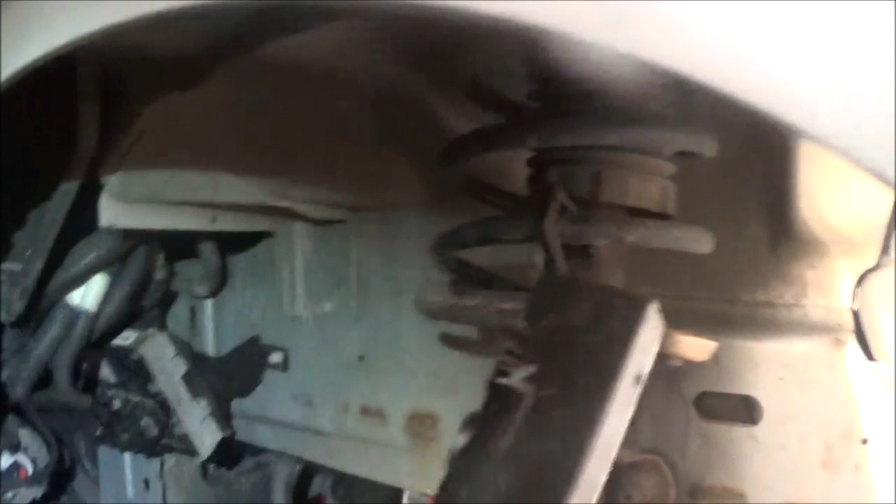You know, first, I was doing a lot of testing, and I did some things that ended up being unnecessary, and I ended up getting it to start. Now, you see here, that's the computer. I had that off, and I was testing wires in there, and what else? The TIPM. I had this off and out. So I was testing there.

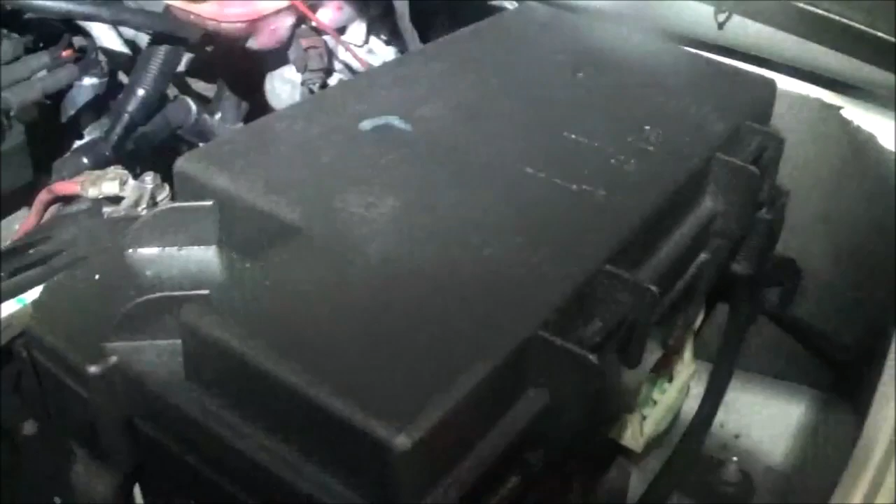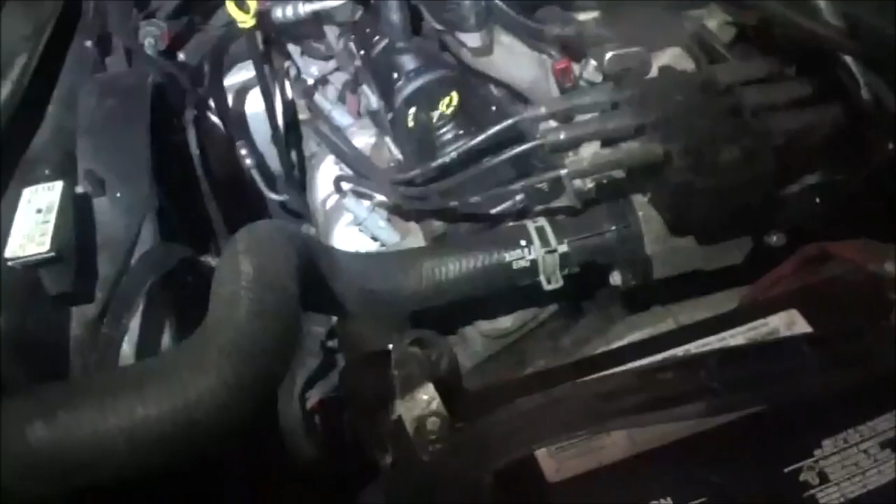There was a relay. It would click sometimes, sometimes it wouldn't click. It was the starter relay. So I was testing the relay, but the relay was okay. And there's one other thing I tried to do, and that was to jump the starter by putting voltage to the trigger wire down at the bottom. And one thing that stayed on my mind is that I could not get the starter to engage.

So I went underneath the van and checked to make sure it had its 12 volts going to the positive on the starter, which it was. And I took the trigger wire off, turned the ignition on to see if it was getting 12 volts. And it would show it, but when I would put it back on the starter, it would come on and go off. So I didn't know what was going on. Was there something in the starter or what?

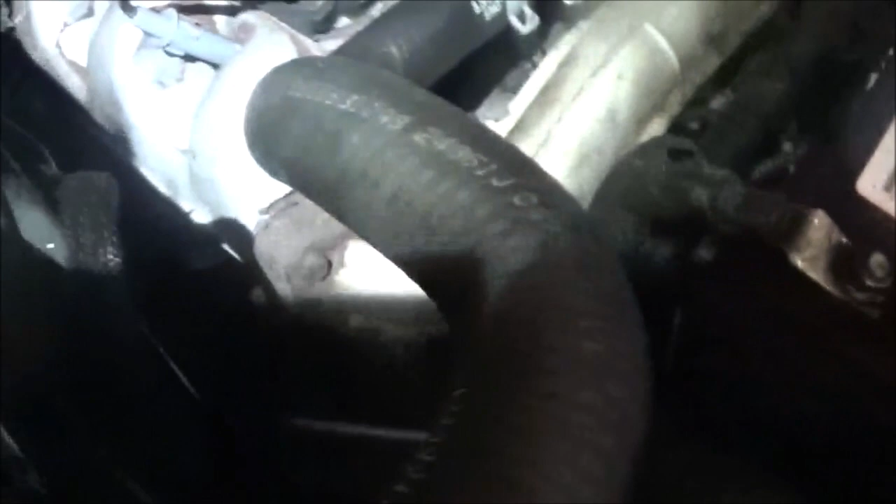I had the transmission range sensor connector off there. See if you can see it. Yeah, there it is. I had it off and I was testing wires. This is a 62TE transmission. And the reason I did that is because it had transmission range sensor rationality. Okay.

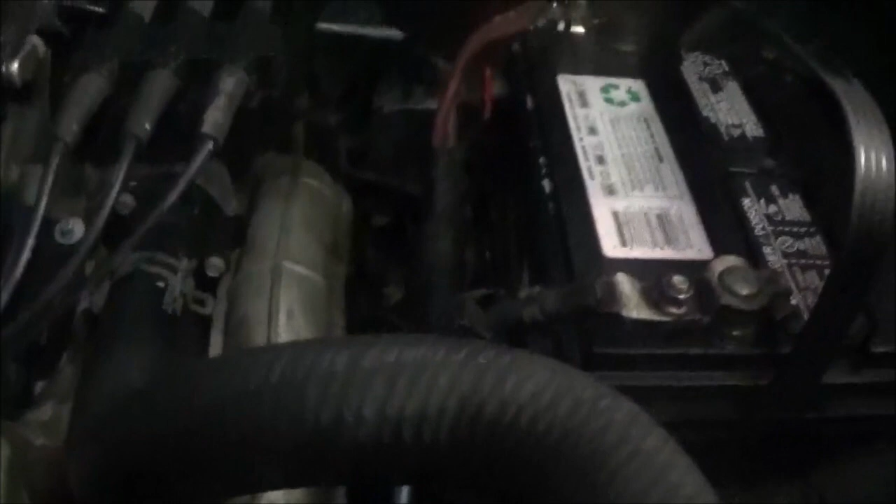As you can see, there's a new starter there. They put a brand new starter on 3 times. Didn't solve the issue. So the main wire right there had its 12 volts, but this little trigger wire here wasn't working. And there was nothing wrong with it. First I tried it there, but I tied into it here. I even tried to jump it at the relay. I figured there might have been a problem from the relay down, so I tied in here and still couldn't get the starter to go.

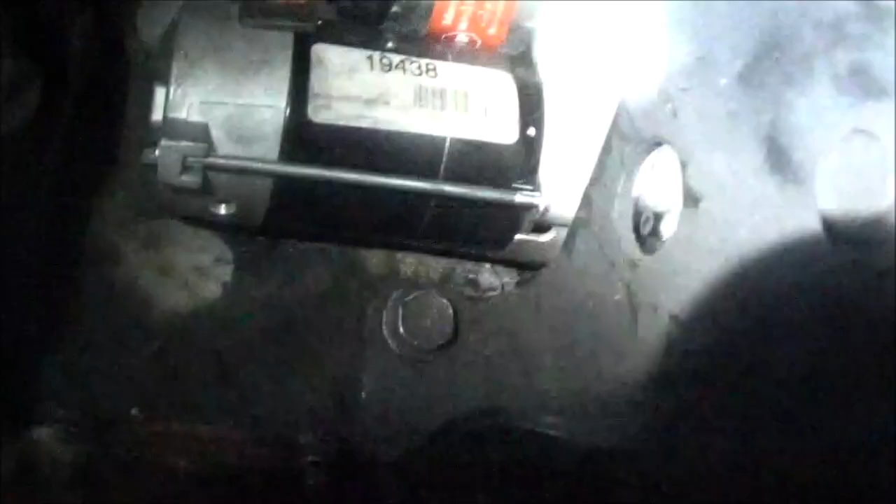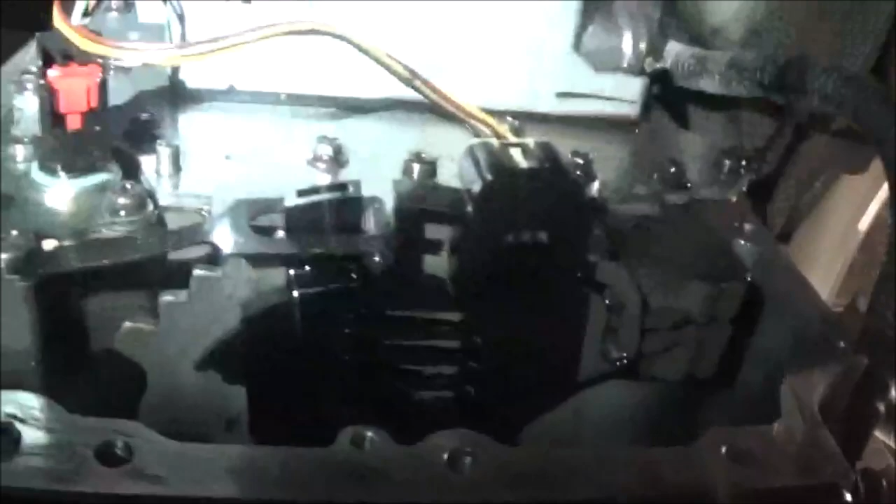I ended up taking the starter off, but I'm going to show you what made me do all this. I had a code, a P0706. Okay, so let's go to what caused me to go through all this mess in the first place. Before I go there, I forgot to show you. I do have this part of the transmission off. The 706 is a transmission range sensor rationality code, P0706. Okay, so that's the transmission range sensor right there. And I ended up changing that transmission range sensor, and it didn't solve the issue.

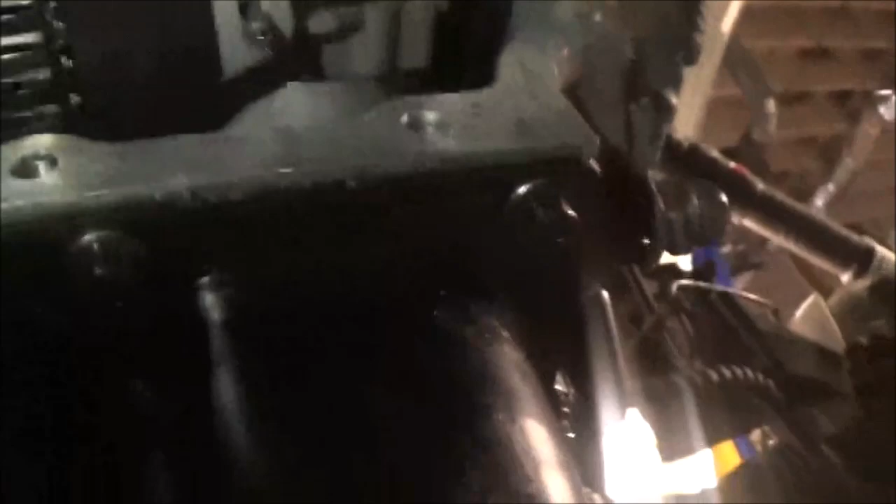Okay, so you have those issues sometimes. So I ended up having to actually find this problem. Okay, the vehicle wouldn't start, and the park, reverse, neutral, drive was all lit up like this. Now the reason it's lit up like this now is because I'm simulating the problem, because I found out what it was, and I'm going to show you what it was. But I want you to see some things that it was doing.

One, it was all lit up, and two, the starter would click, click, click, wouldn't turn over, and then after a while it would not do anything at all. You could turn the ignition all the way over, it wouldn't do anything. So the codes that it has now, since I have something disconnected, is this right here.

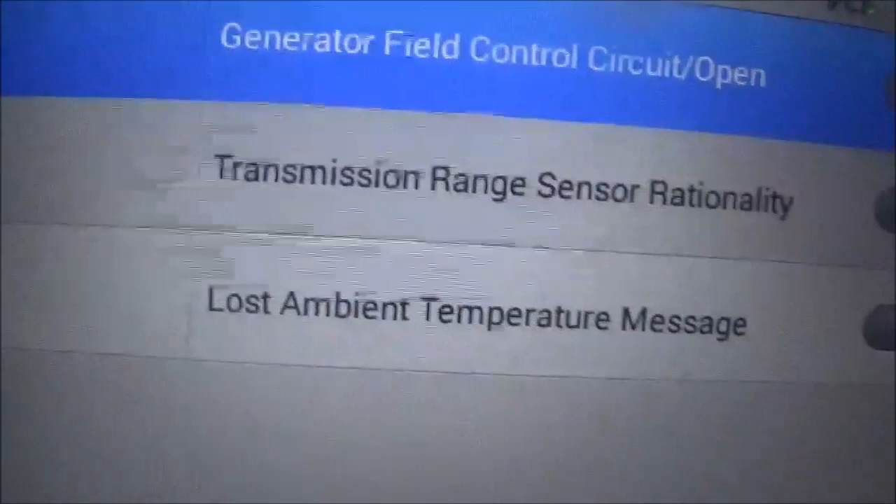It has P0622, P0706, U110E. Now the codes that it did have were the P0706 and the U110E, which was transmission range sensor rationality and lost ambient temperature message. It did not have the P0622. Okay, so I'm going to go back into the history and let you see what it had.

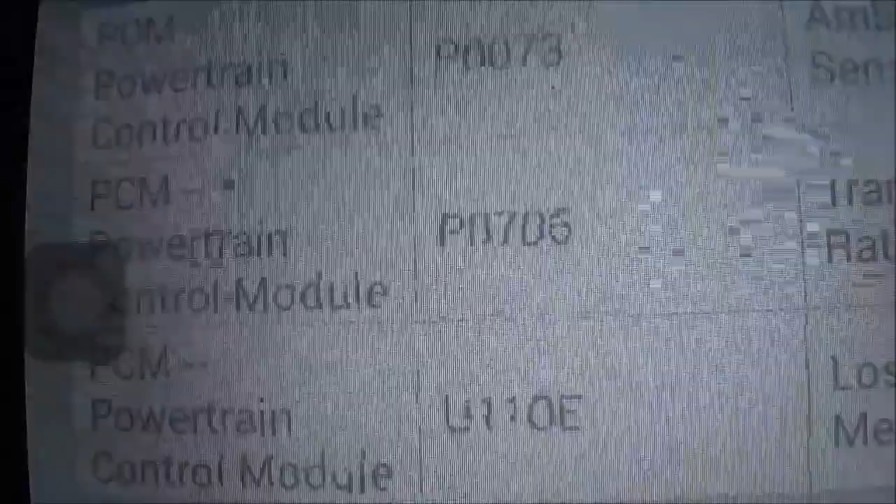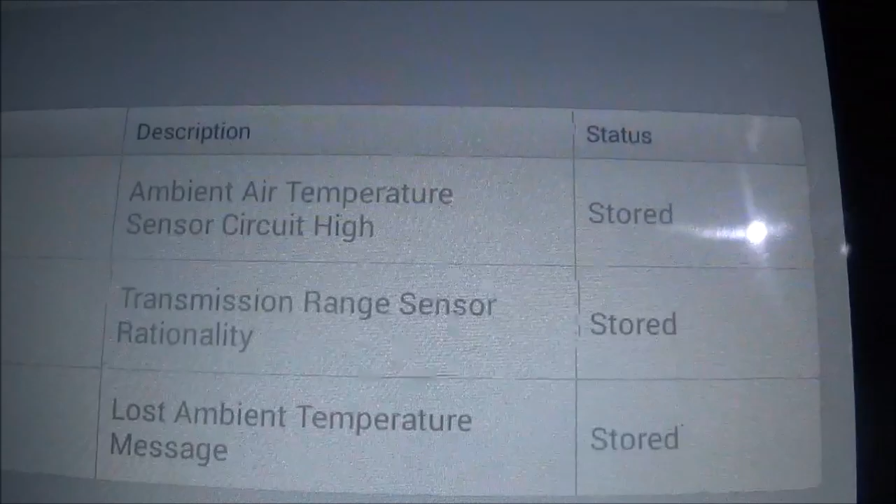Okay, here is the history here, historical test. In the history, it had ambient air temperature sensor circuit high stored, and there it was, the P0706 transmission range sensor rationality stored, and it had that U110E, PCM powertrain module lost ambient temperature message. Okay, this is what was stored originally while it would not start. And also the park, reverse, neutral, drive was all completely lit.

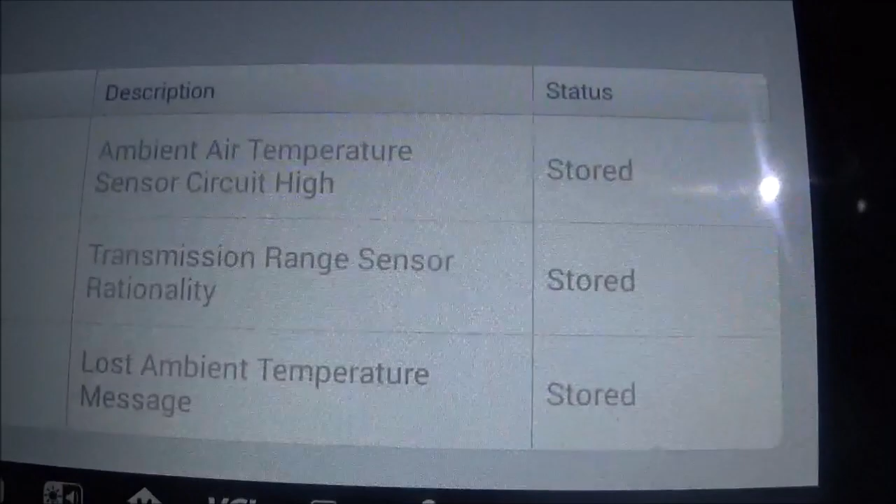Okay, now there's something else that was happening when I went to the live data. It was showing in the live data, when I looked at the transmission range sensor, that the pattern of open, open, closed, open, all of that was working the way it's supposed to.

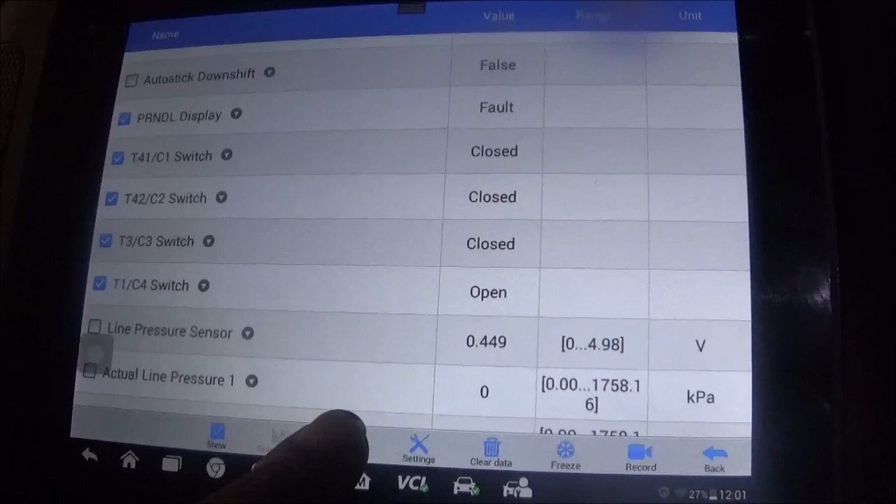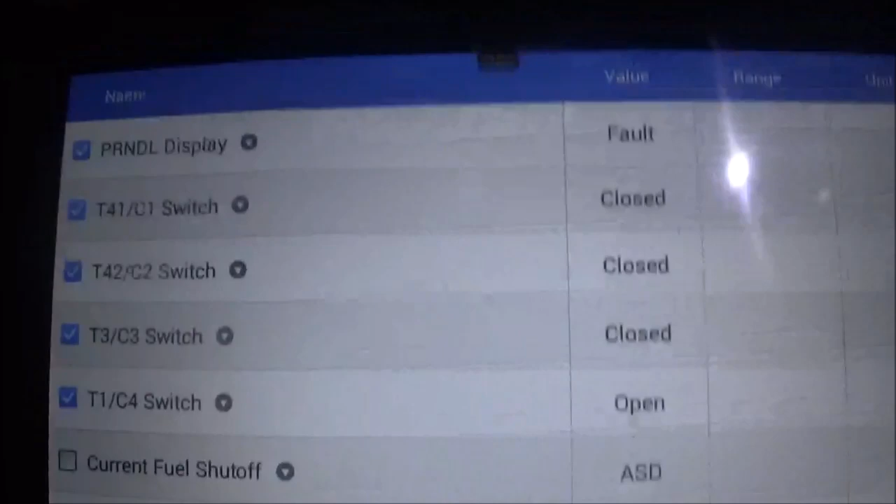Alright, let me go to top. Now if you see here, it said the PRNDL display has a fault. But what was happening, the T4 switch, 41, 42, T3, and T1, the ones at the bottom there, they all were reading like they were supposed to, but it would still say fault. So right now the display is completely lit up right there, but it still was a fault even though these would read correctly.

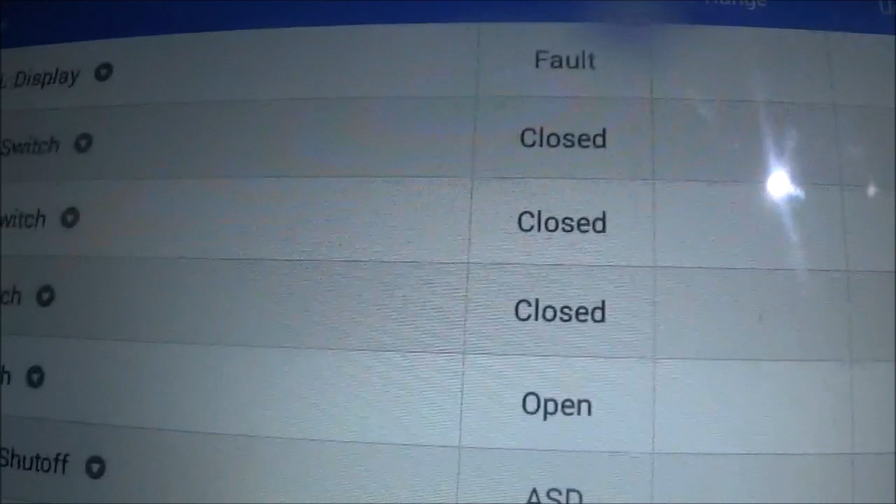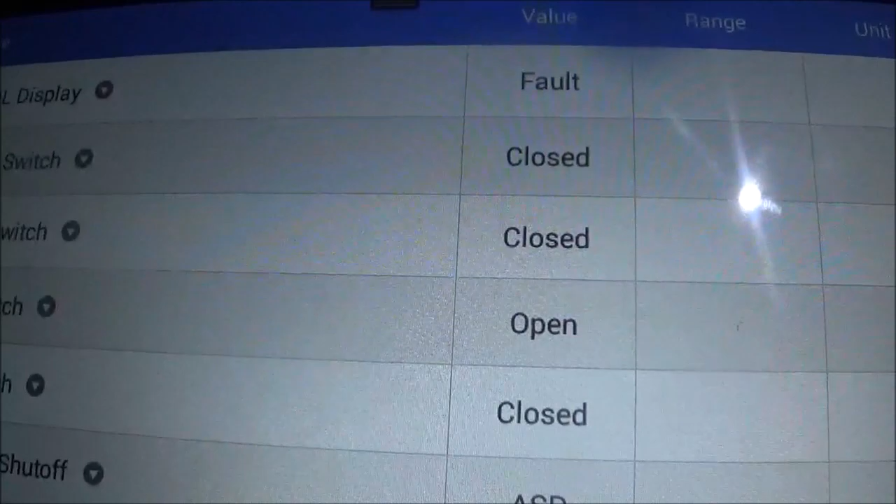So I'm going to put this in gear now. Let's see if it does. See, they will read. Now that's the problem. That's the correct pattern. Open, open, open, closed. That's in drive, I believe. So you got park, which is closed, closed, closed, open. Reverse, open, closed, open, open. Neutral, closed, closed, open, closed. And drive, open, open, open, closed.

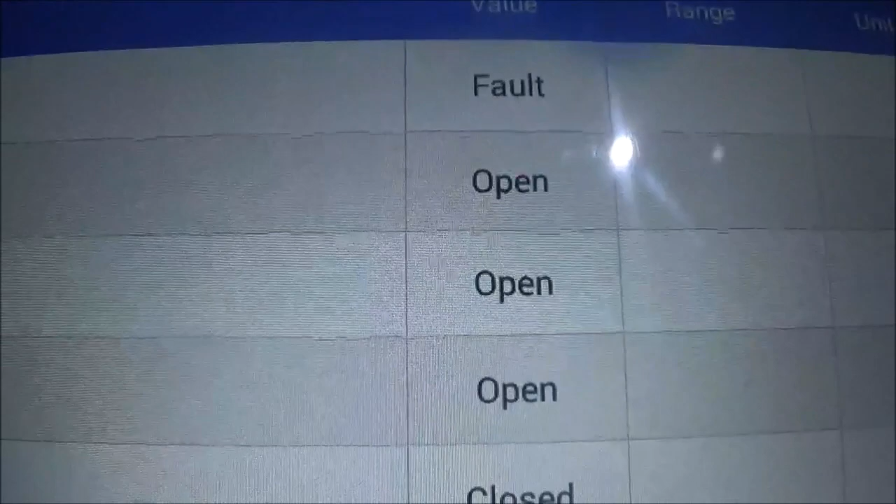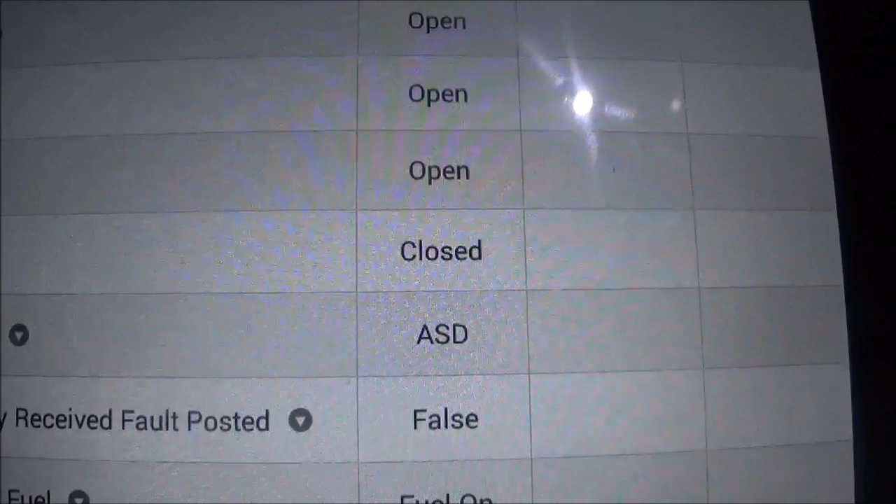So even though it was showing the correct pattern, why was it still saying there was a PRNDL display fault, which it was? Okay, and which it is. So now, and why was it that the car would not start? Well, after doing all of the testing and the things that I was trying to do, as I told you, I took the computer off, I tipped them off, I jump tested, tried to jump the starter. That stayed on my mind.

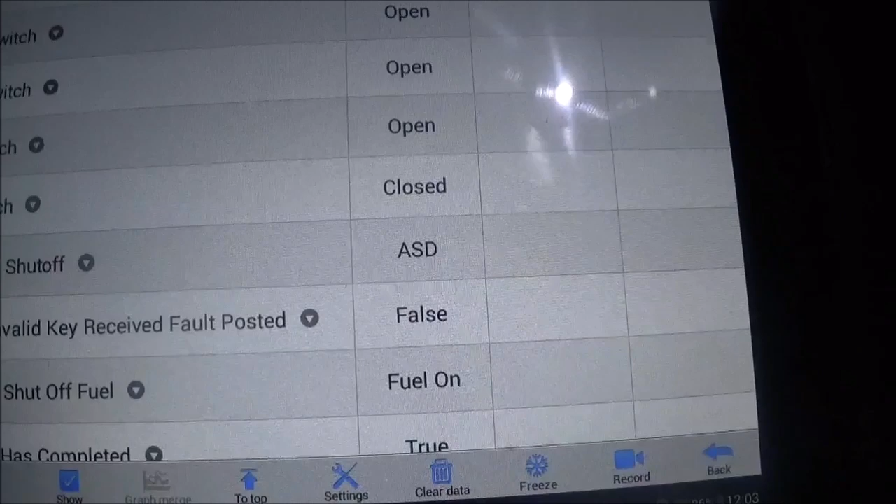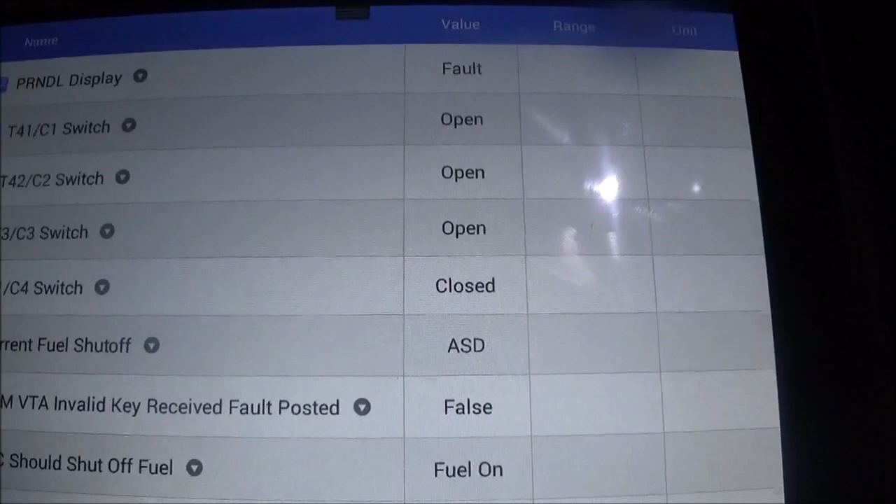So what I ended up doing is taking the starter out, tested it, made sure it was fine, and it was. So there's a shim in between the starter and the transmission housing. I took the shim to the grinder where the wire wheel was and wire wheeled it off, and I put it back on. However, while I was putting it on to make sure that it had good connection, I looked to the side where the transmission was, and that's when I decided to do something. And it was tight, but I decided to do something. I'm going to show you what that is.

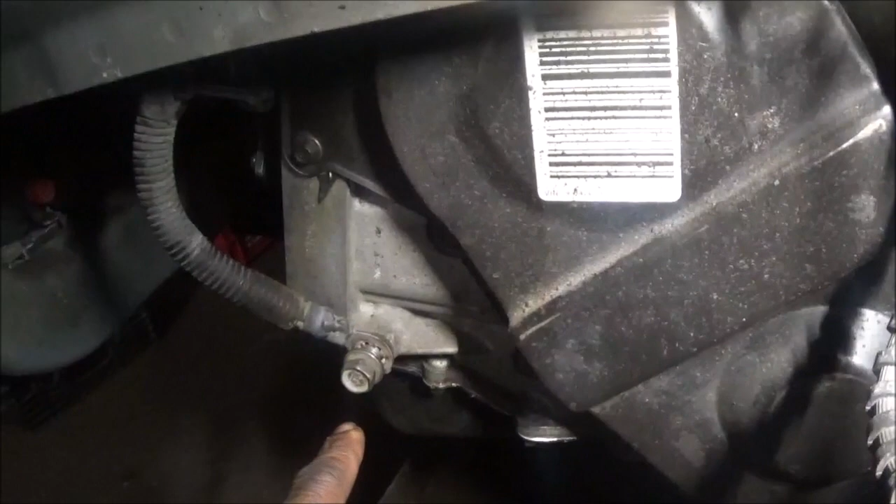Okay, over here on the driver's side, there's where the computer is, and there's where part of the transmission is, a ground right here. Now I have this loose. I have it loose to simulate the problem. This is why the car won't start. It's also why there is a transmission rationality code, which is a P0706. Now it was tight, but what I ended up doing was taking it off.

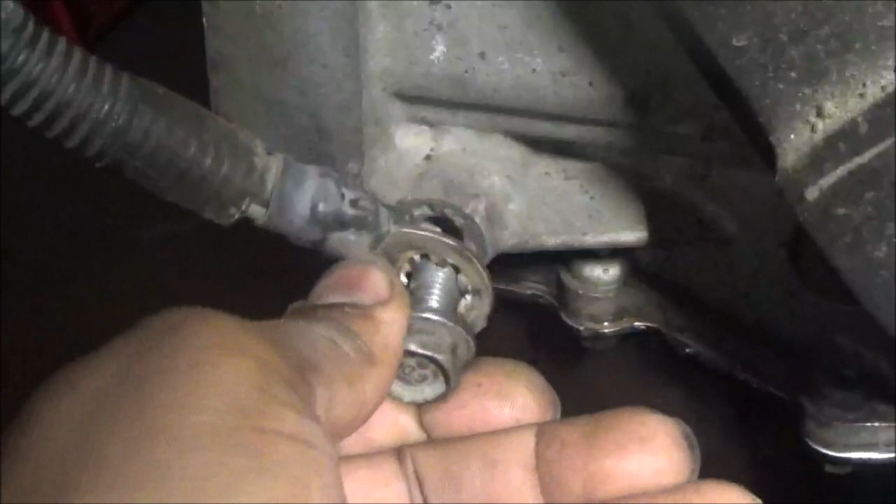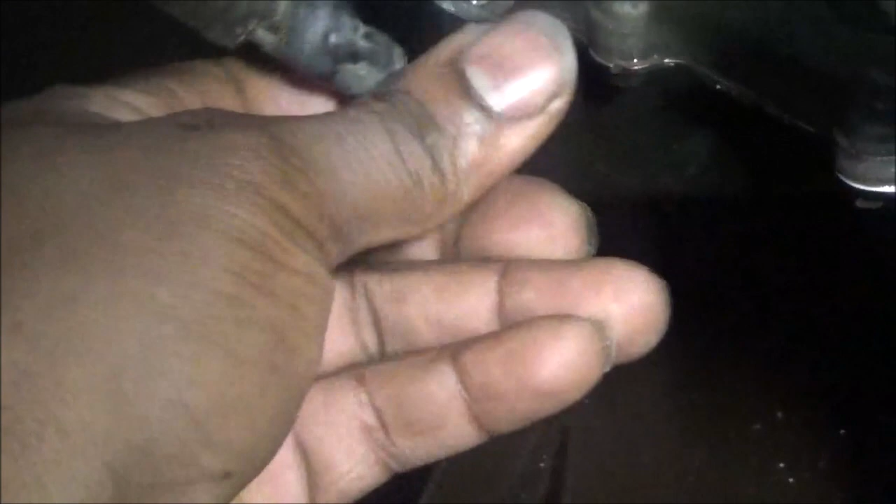I took this off here, and then I took my wire wheel and I cleaned this with the wire wheel. Then I wire wheeled this part and the opposite side, and then I took this bolt here to the grinder and wire wheeled it, this also, and then I stuck this back on. Okay, now right now the car won't start, or if it's very close, it may start. Now, I don't even have this all the way. It may start because it has some type of connection here, or it may not. But you see here, this is not tight here.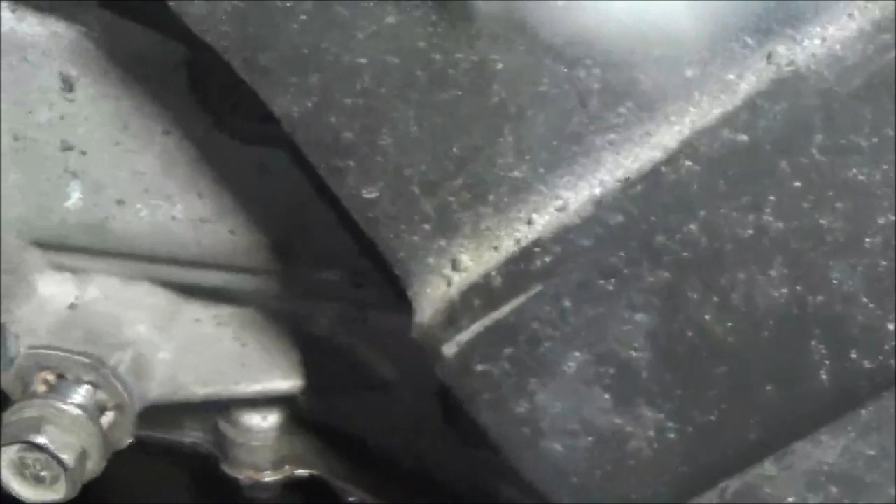Let's see. I'm gonna go over here, see if it starts. Still has the codes there. Even if I erase them, they'll still be. Let's see what happens. Now I'm turning the key, it won't start. As you can see there. Let me see here. Where's the key? Turn the key, won't start. Okay, and it has the P0706 code. Okay, let me go back over here.

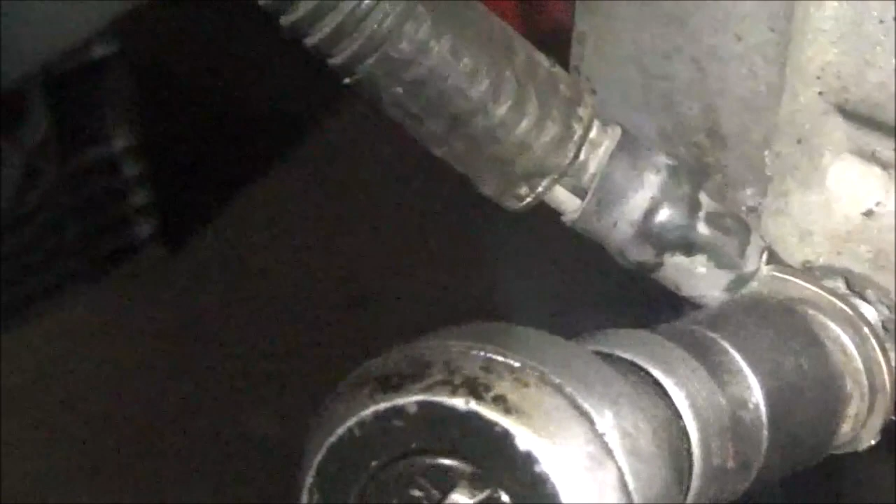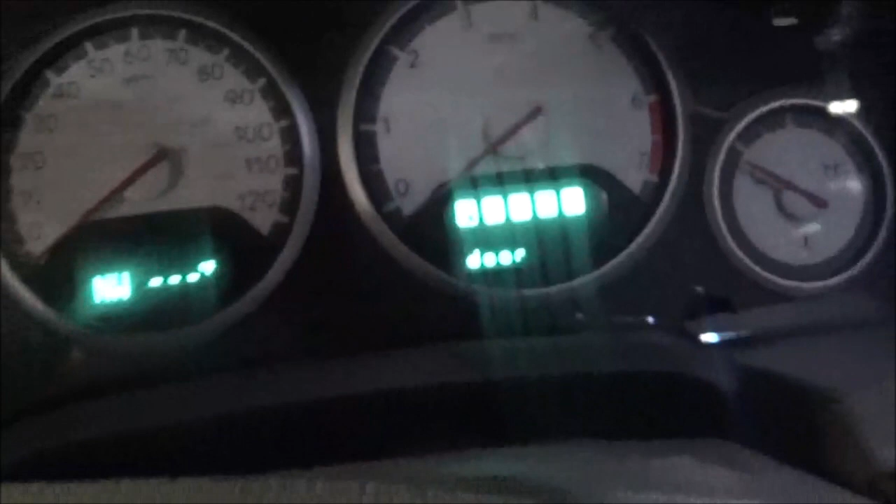Where is it? Okay, it's a grainy thing. Okay, what I'm gonna do, I'm gonna tighten this bolt up. Just tighten it up. Okay, now we're going to see what happens now. Still doesn't want to start.

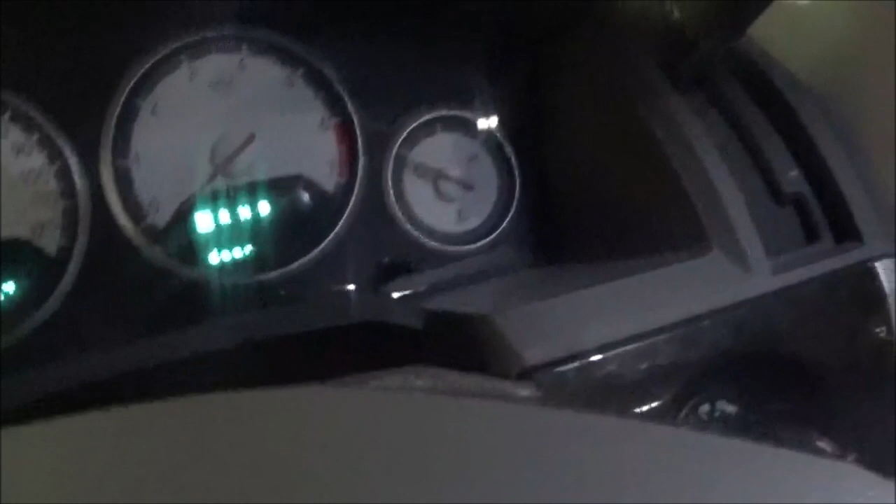Let me go right back down there. Okay, I know why it didn't start. When I erased the code so it can go back to park, reverse, neutral, drive, I couldn't see that I had the gear selector down in drive. So that's why it didn't start. So what I'm gonna do, I'm gonna loosen that bolt again, and we're gonna see this go back to the rationality. No rationality right now, all the codes are eliminated.

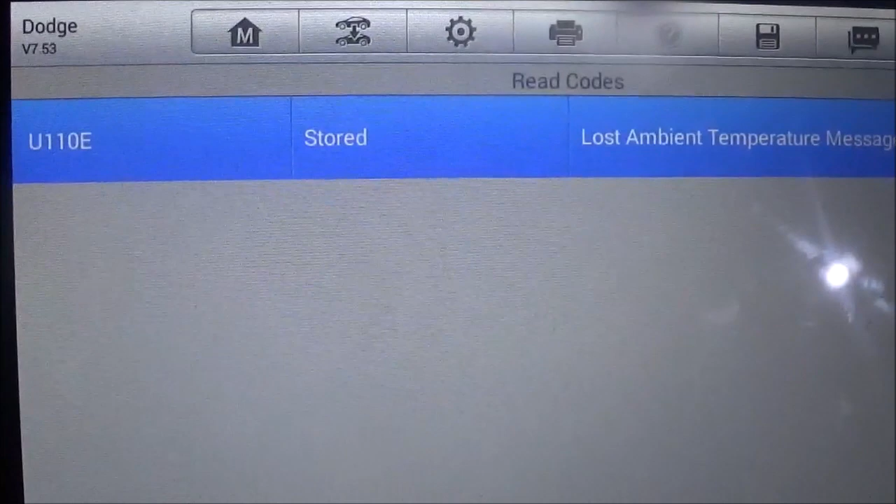So let's go here. So what we have, that P0706 is not there anymore. Okay, it's there no more. So what I'm gonna do, I am going to loosen that bolt up again, and then we're going to see the P0706 pop back up. So let's go back. Where are you there? There you go.

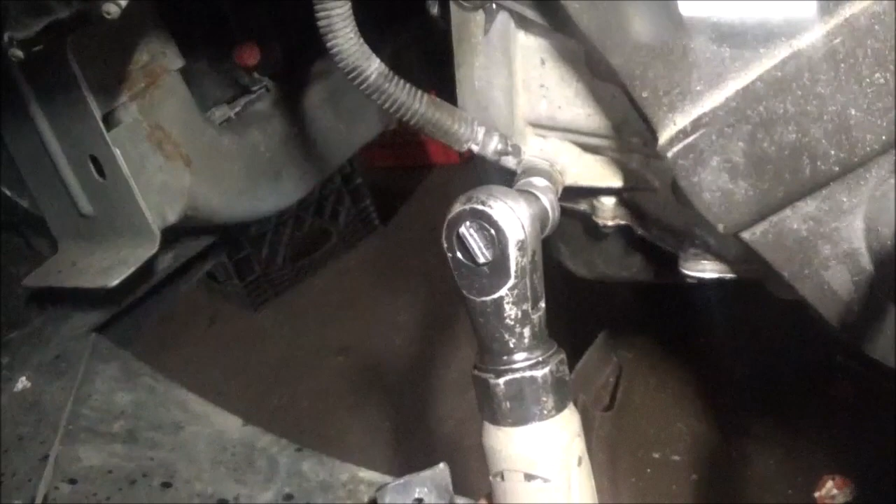Okay, that's loose. Make sure that I don't have much of a connection there. Now, that rationality should come back. Let's see. It may start, it may not start, but let's see what happens with this. Okay, I'm about to try to start it. It won't start. Well, it's trying.

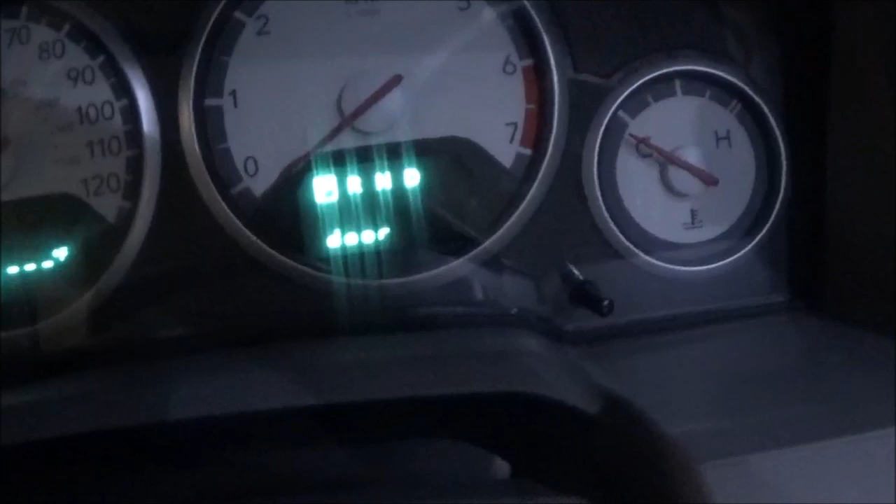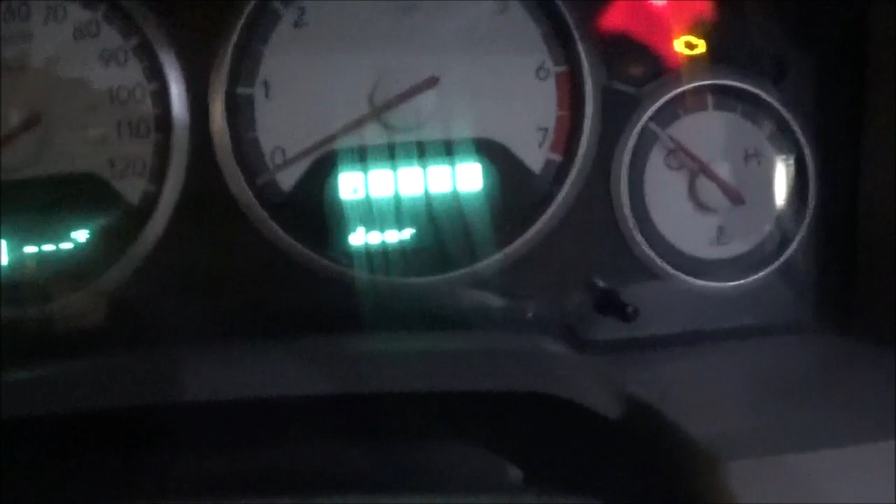Okay, it's still making some kind of connection. So what I'm gonna do, let me go and make less connection. Where are you, bolt? Alright, now that's even less connection. Okay, let's see what happens. Still making connection. There it goes. See what happened? You hear the starter go clink. Alright, there it goes. It all lit up.

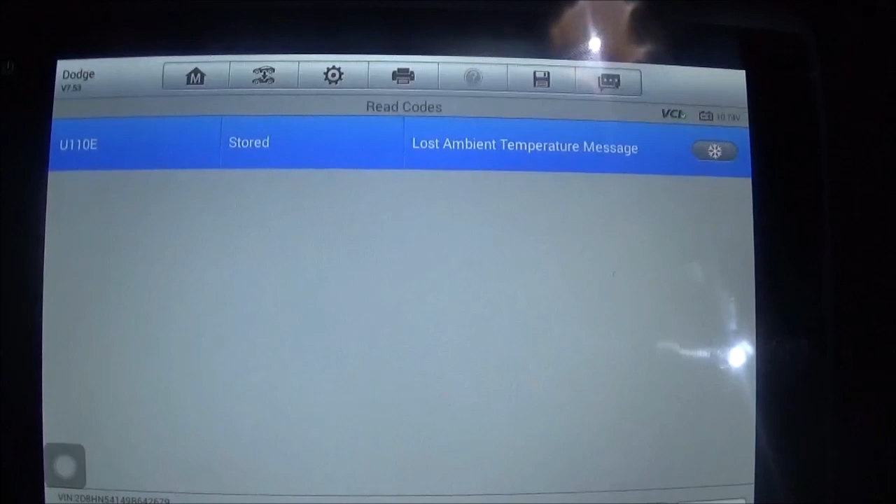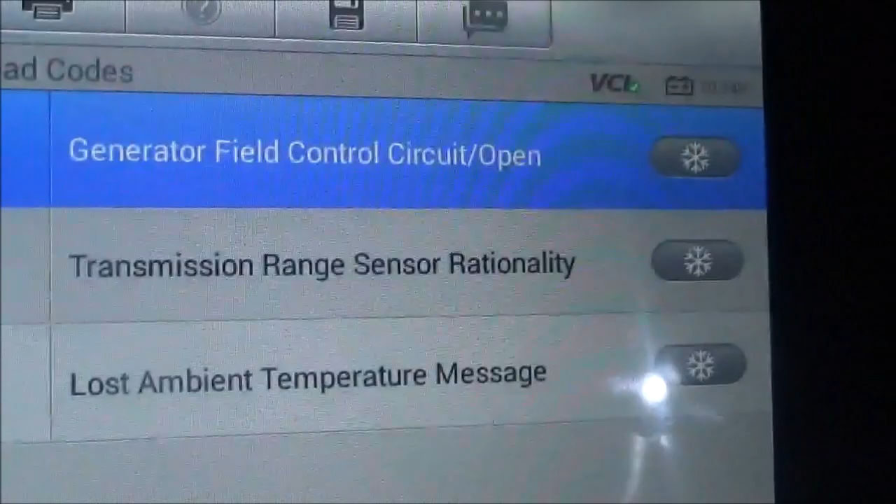Okay. So it should have that P0706 code. Let's go back to here. We'll back up and reread the codes. There it is. P0706, transmission range sensor rationality, and the U110E, lost ambient temperature message or something. There, those set again.

Alright, so again, what happened was that, okay, let me get back over here. That ground was not loose, okay? It wasn't loose. So I just happened to go to that ground because if that starter wasn't getting a connection when I tried to jump it, the only thing I could see that could provide a decent ground for that starter would be that ground that's coming here. It's a very big ground. So as you saw, there was a fault. It was showing close, close, open, open, open, close, close, but it still said a Prindle fault.

Now what I'm gonna do, I'm going to put some dielectric grease on this, and I'm going to tighten that ground up, and we're going to go right back and see if the Prindle fault is gone, even though it's still showing open, open, close, open. I already cleaned it off, and I just want to make sure it's not corroded anymore. And then we'll check to see what the computer says with the signals. Okay, I got it tight. Make sure you get this very tight. It's tight, and I got dielectric grease on there.

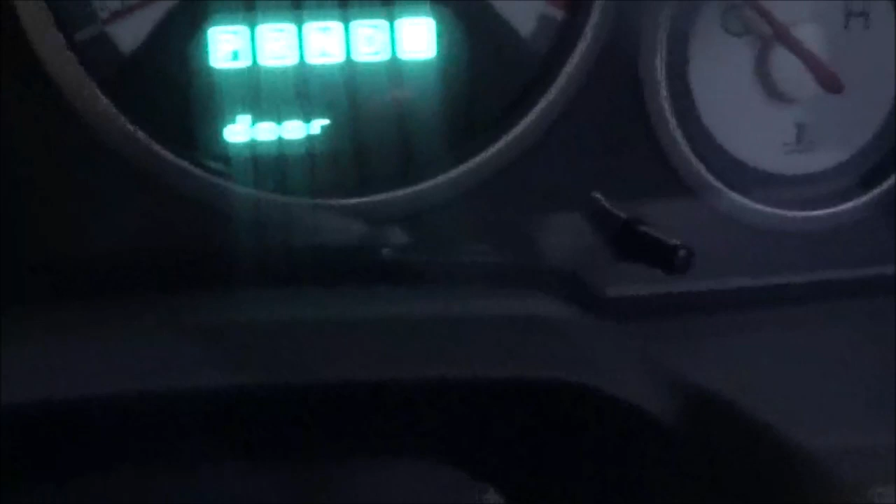Now we're about to go inside the van, and I'm gonna have to erase the code, or the PRNDL light will stay that way. We erase it, and then we're going to look at the data PIDs and see if that false rationality reading is still there. That's going to still be lit up until I erase it. Okay, now I can look at it as in park. So this should start. All I do is bump it. Yep, it starts.

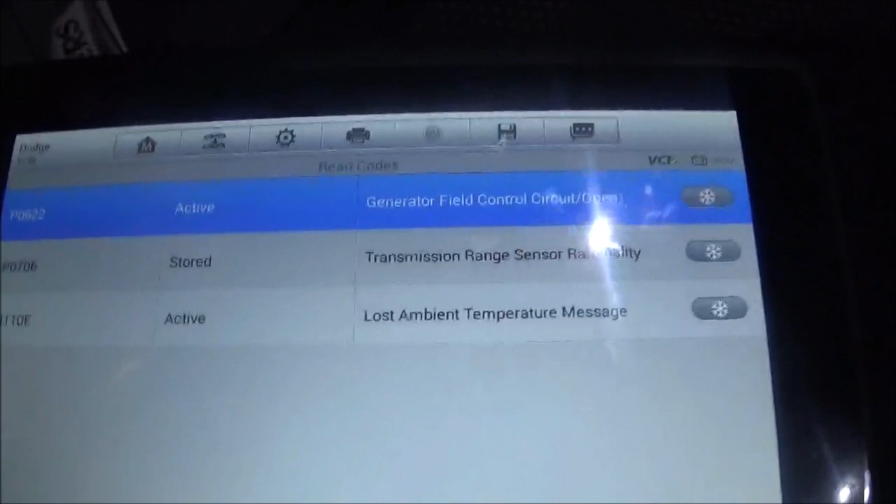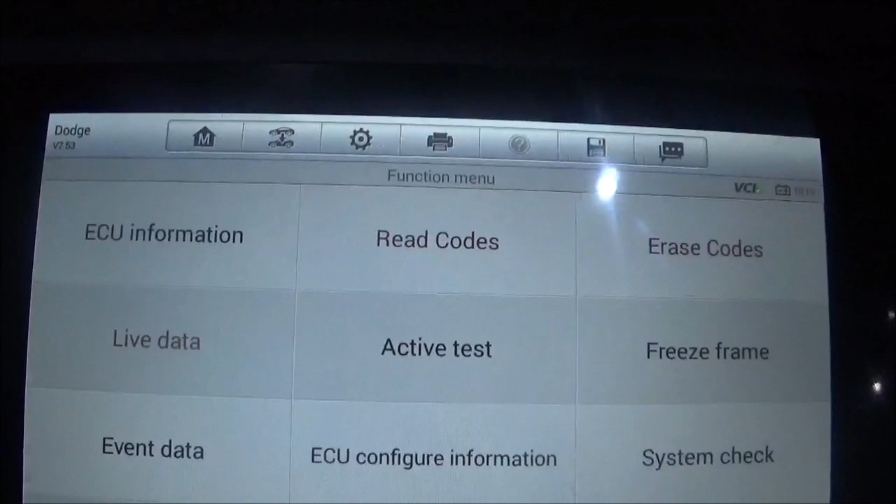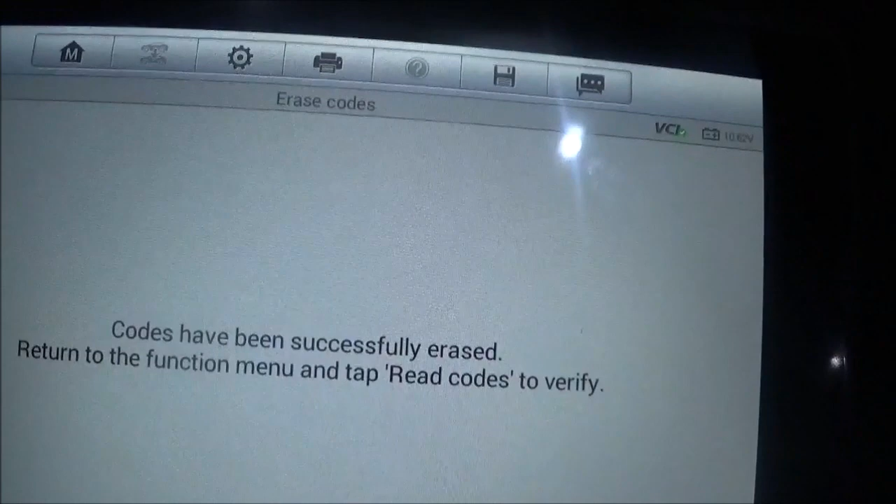Okay, now I'm gonna go back here. And the codes there, I'm going to erase those. Ignition on. Yes. Yes. Codes have been successfully erased. So, since it's erased, you look up here and you see that it's showing park, reverse, neutral. Now, that should bump no problem. Let's try again. It did. There you go. I can't start it completely up because I had that front trans pan off.

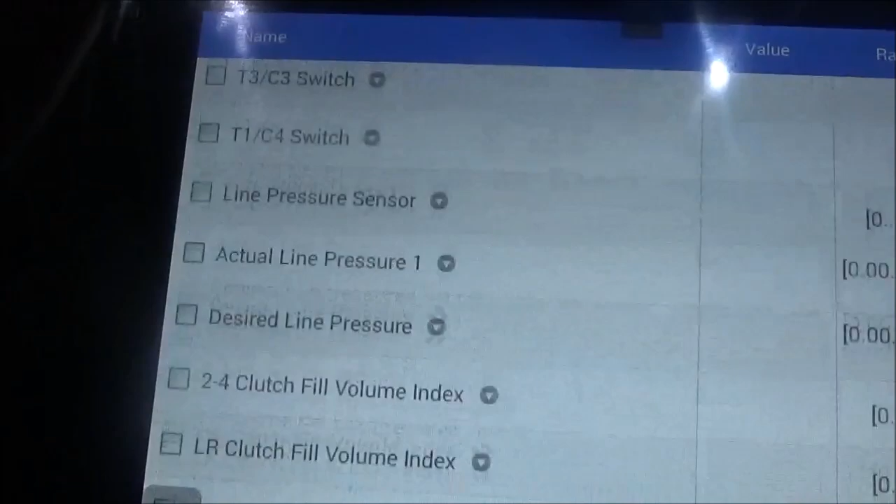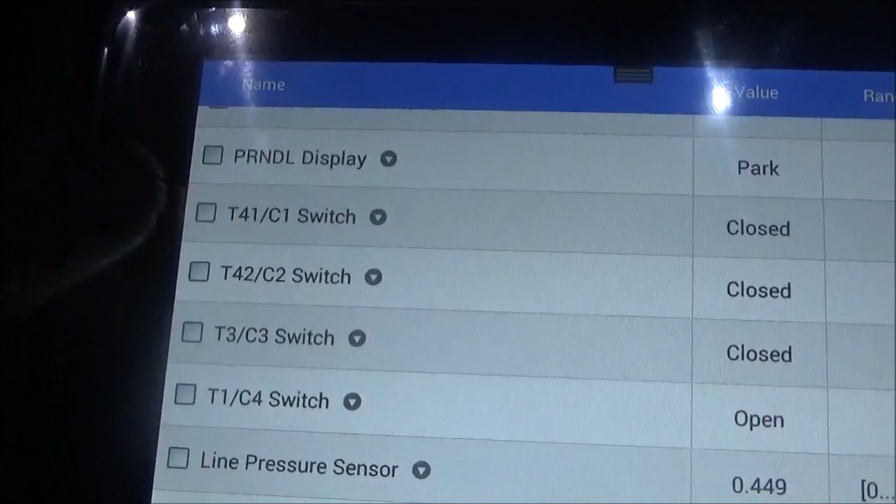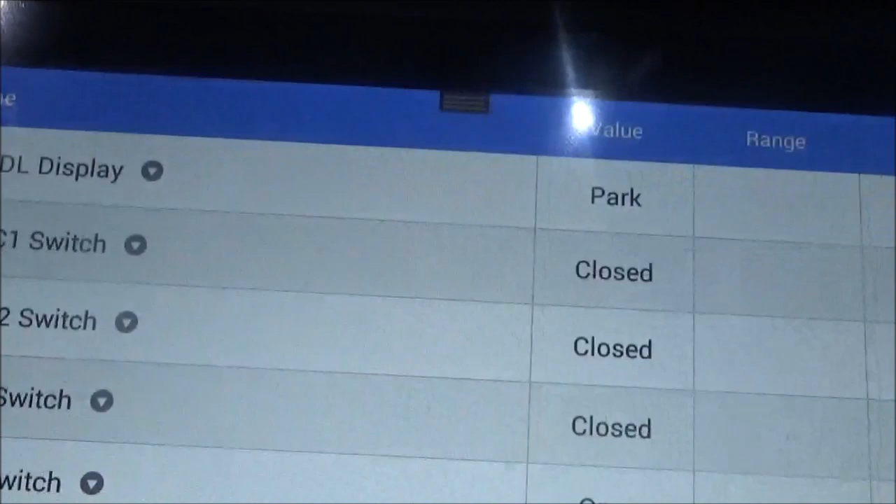Alright, now, I'm going to go over here. Go to live data. And what I want to do is go up to the transmission range sensor PIDs. I passed them. There it goes. So the PRNDL display. You remember this was reading close, close, close, open. This will always change, but this had false on here. So now it's not showing false. So let's see what happens when I put this into gear.

Let me get inside this van. Ugh. Man, I'm all smashed up in here. Oof. Alright, there we go.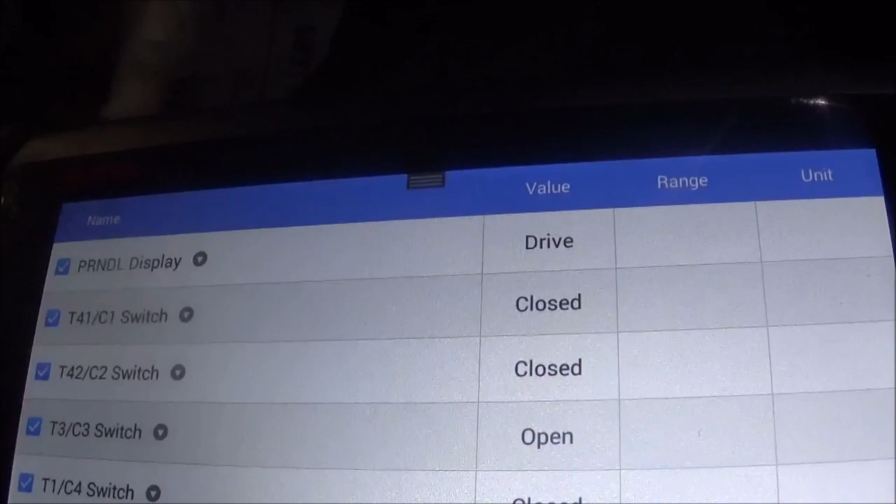Now, turn ignition on, and I'm going to move this. Park. See, reverse. Neutral. Drive. And we're looking at that part there. Neutral. Reverse. Park. Now, everything else, the pattern was right. Close, close, close, open. It's just that this part here was reading false, the PRNDL display. So now we got that right. The PRNDL is doing what it's supposed to do: park, reverse, neutral, reverse, neutral, drive. That's working like it's supposed to. If I bump it, it'll move. Bump, bump. The starter is doing its job.

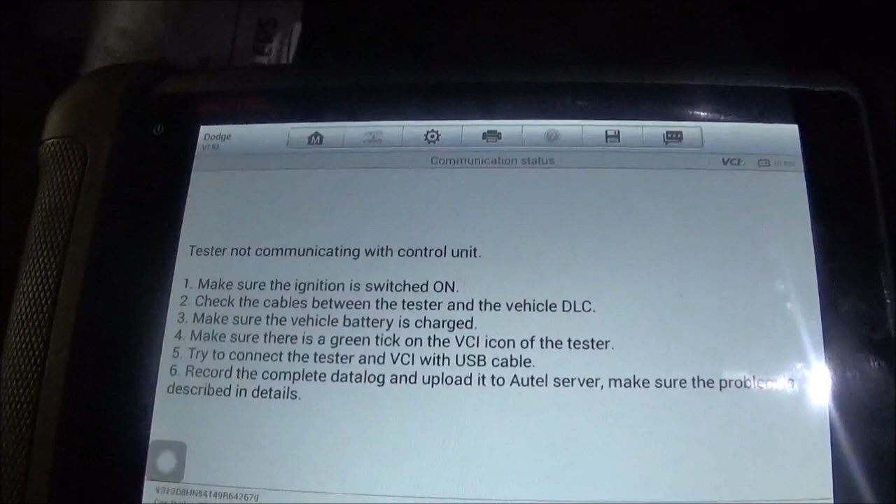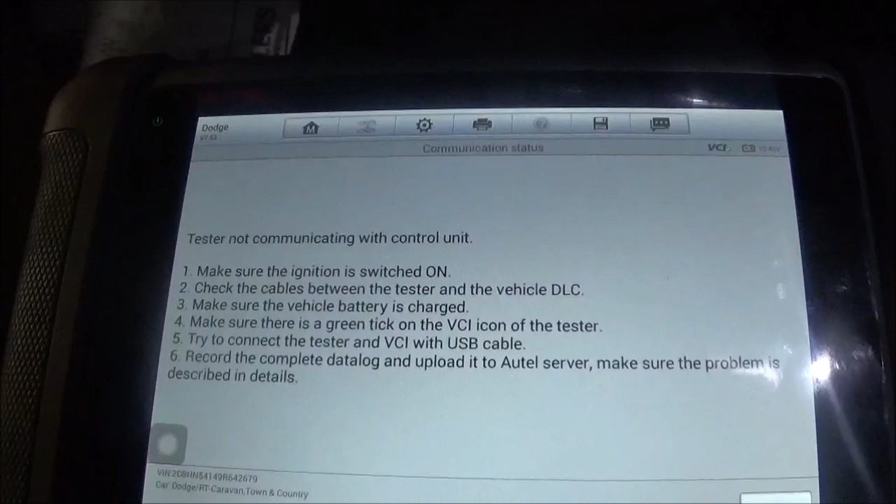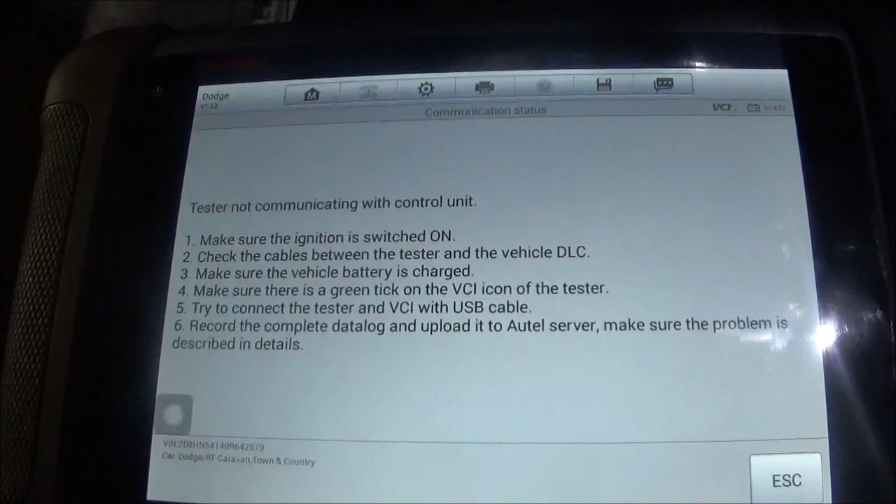Okay, so what would I tell you on this? Check the grounds. The code P0706 was set. The symptoms were a no start or clicking sound. It would click, click, click. It would not start at all. The PRNDL was lit up with squares on all of the display, and it had a code P0706. So what does that tell you? Always check the ground. Again, the ground was tight. However, it had corrosion that was separating it from making a good ground. And the only thing I did with that ground was clean it.

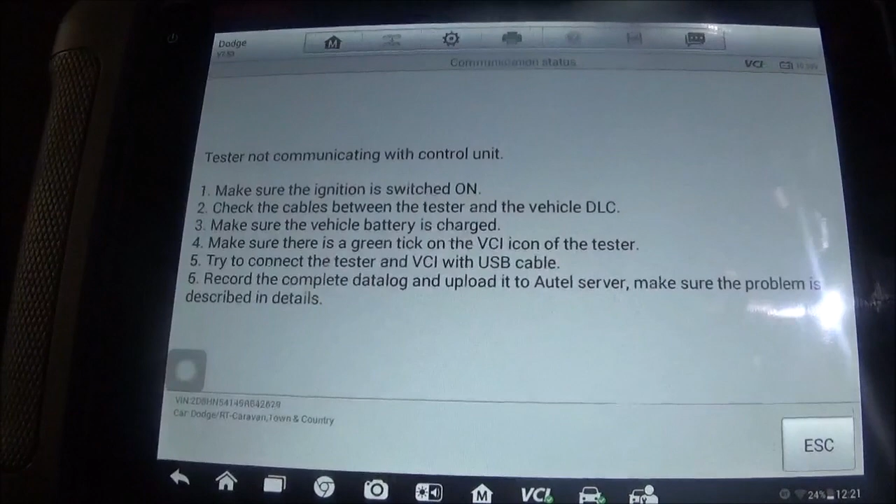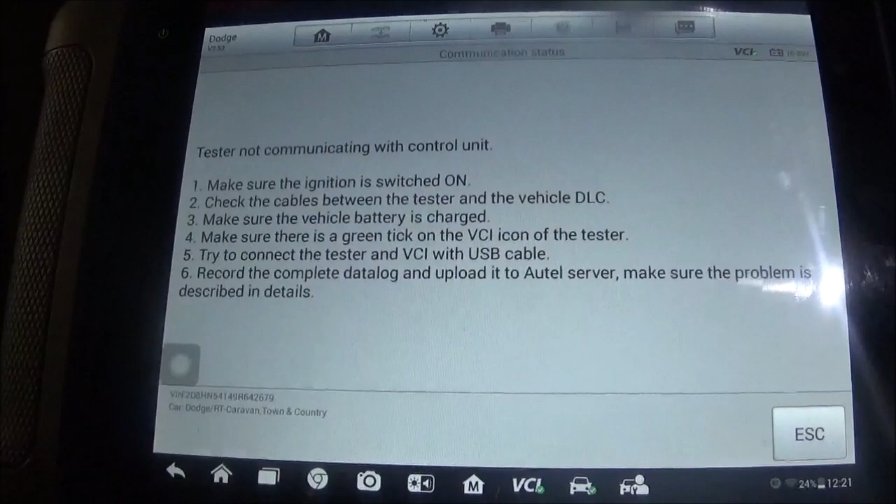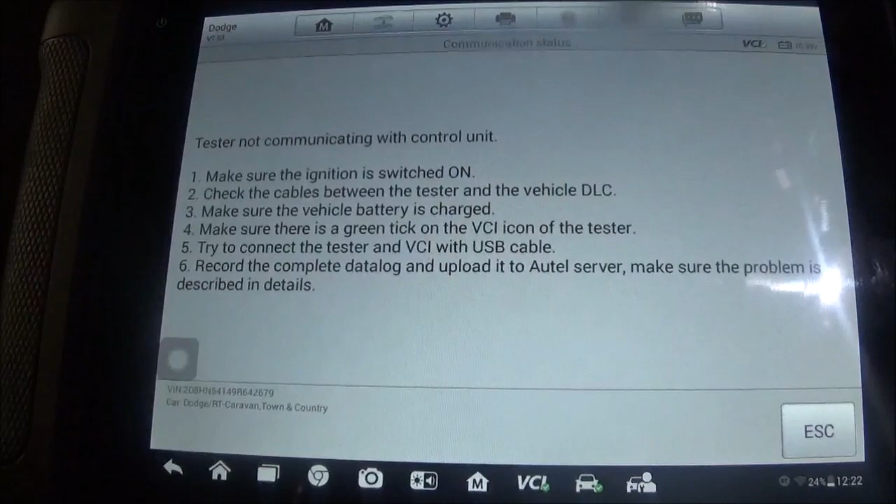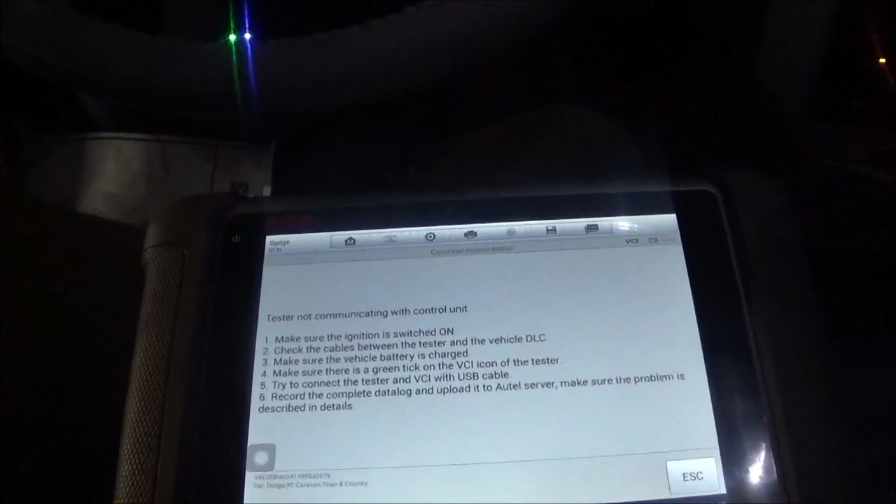And they changed 3 starters for this. But hey, I took the transmission range sensor out, changed it. I took the computer out. I took the TIPM out, and I was checking it. But I ended up paying attention to that ground because I couldn't jump the starter. If I had done that first, this vehicle would have been gone. So I'm telling you this so that you don't have to make the same mistake. It was not a range sensor problem. It was a ground problem.